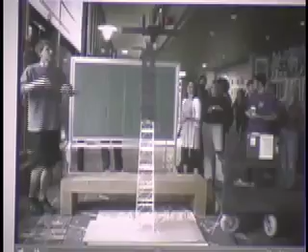And then you can take this video. It's unfortunately not quite the highest resolution, so when you blow it up, it'll be a little bit fuzzy. But you should still be able to frame through it, right when it finally fails, and get some idea of which member failed first, whether it broke at an individual member, or you can usually see some of them tip.

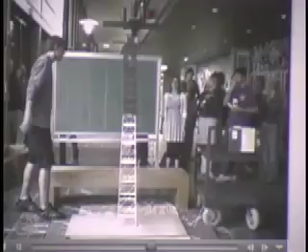This one's still got a ways to go. I don't know, see if we can speed the process along here a little bit. You can also speed it up.

And will he do it? We've got to get some more weights. I must say, I think it was the balsa wood perhaps, or was it at the base? It was the base that finally did it in.

And you can bring it back to life. Let me see if I can. Well, okay, I can't step through it so well. Why not? You should be able to frame through it. Ah, okay, we're one frame off there. Up, up.

Oh well, I can't get it. You can try to capture that frame where it actually fails. At 30 frames per second, you should be able, even at that kind of slow speed, to see it.

And then you can make some statement about why that member failed - that it broke, it was weak, or something to that effect - and get that all put together in your report.

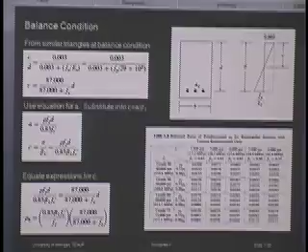So, let's see, we were supposed to do something today with concrete. Where am I? I'm supposed to talk about this. Oh, that means I don't even have my clicker. Man, this is primitive. Okay.

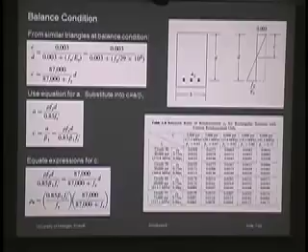Well, you probably worked through a problem already. You may have even done it yourself, the analysis problem. So we can probably get through this pretty quickly.

This always fascinated me, just this technique, the idea that you've got this little similar triangle up here, and then this big one that's kind of a philosophic concept, don't you think? This really exists, but this dashed line is just so creative. The idea that you could pull that dimension down, you add these two dimensions, it becomes this giant triangle that doesn't really exist, but you use this sort of figment to work out all this equation, because it's based on this ratio.

C is to D, this to this. So the D is the leg of this giant triangle, and there's the base of it, which is then that number there. It's that plus that plus that. That becomes that whole thing. So then you have a ratio of triangles.

It's amazing. I mean, who was this? The Greeks that came up with ratios and triangles, or maybe the Egyptians? No, let's say it's the Greeks. And we still basically use these concepts today.

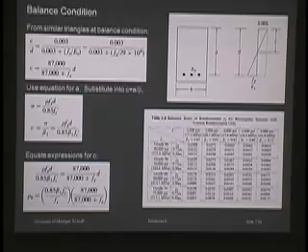And the myth has perpetrated for millennia, right? I mean how many, 3 or 4 at least. And it's not, they're concrete. This guy figured out not only that they were concrete, but where they mined the ore, what the formula was, how they put it all together. This whole thing -- you always see pictures, oh it was such a master feat to lift these big blocks way over their head, and up. No, they just cast it. Buckets, a bucket at a time, and all up there.

And the part of what kind of proved it is he found a couple things that were cast in there, like a toothbrush or different things that obviously weren't in the natural stone. A human hair, I think, supposedly. I don't know, well maybe not, because you'd think that'd decay. Maybe, well I don't know. A lot of things don't decay. Mummies don't decay. Anyway, yeah, toothbrushes, apple cores, everything was in there.

And then the ultimate proof, he wanted to take a couple blocks and break them apart. And the Egyptian government, when they heard this was going on, totally forbade him from doing that, because of course it would shatter this myth. Although it's still, I think it's even better that they cast it, that's kind of cool. But no, they wouldn't let him do it.

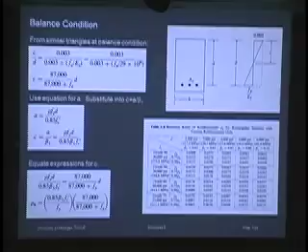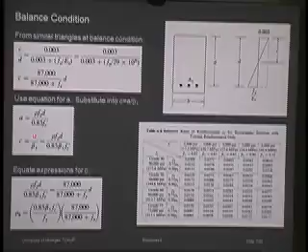Anyway, A, here we go. This is the formula for A, which comes from -- we talked about this already, didn't we? I better go on. But you substitute A, this is the formula for A, and you substitute that into here, which is the formula for C, and you get this, and then you have two formulas for C.

This one from the similar triangle for C, this one from the relationship of the forces. This is a force relationship, this is the strain relationship. So you equate the strain and the force like this. This one goes here, this one goes there, and then you solve for rho, which is somewhere.

There's rho. And this then, because this is set up, this defines the balance situation. This is failing, and this is right at yield, and this is the yield strain, the steel yielding, and this is the concrete yielding. So this diagram is what defines it as balanced. That's that diagram right there. If I put that on an exam and said, what is rho, when you see this, you should say, oh, that's rho balance, because that's right at the fail.

That's a definition of failure strain for concrete. Isn't that interesting? The definition of failure is by strain, really, not by stress. It's how much it's being crushed that defines the strain, that defines the failure. That's kind of interesting.

Anyway, so then that is the balance condition, and this balance is different. You can see, here's F prime C and Fy. So every time you have a different grade of concrete, there's a different balance. That's kind of interesting to know, because the amount of steel you're going to be allowed to place in the beam is dependent on what the balance is.

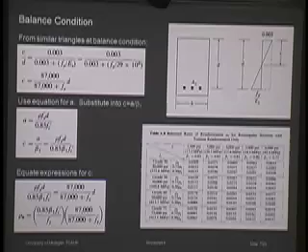So if you're designing a beam and you specify something like 2,000 psi concrete, you're going to have a big beam, that's going to be a chunk of concrete. If it's important to have a small cross section, then what you're going to need is a higher psi.

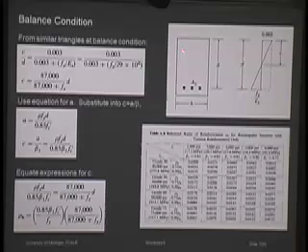Of course the concrete's stronger, but even more important, you're allowed to put more steel into it, so the whole thing gets stronger. It's not just the fact that the concrete's stronger, because really the concrete's only acting up at the neutral axis—it's a pretty small amount for the whole section.

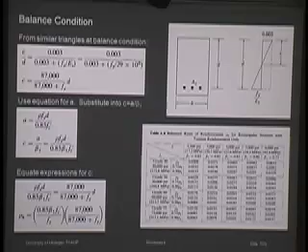Anyway, the price you pay is money, because the stronger the concrete is, the more expensive it gets. It gets more expensive because it probably has a little bit higher percentage of cement in it—more cement, less sand and stuff. It may even have some admixes to get the strength up that high, like a super plasticizer, a water reducing agent.

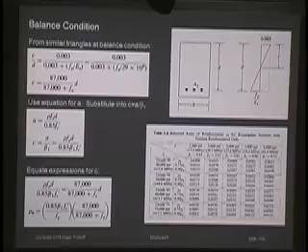Remember, the strength of the concrete is controlled primarily by the amount of water in it. So to reduce the amount of water, you're going to have to do something else to prevent it from getting too stiff. You may have to pay for an admix, a super plasticizer, or something that allows it still to be workable at a lower water content. That just increases the price of the concrete—it makes it better, but it's a little bit more expensive.

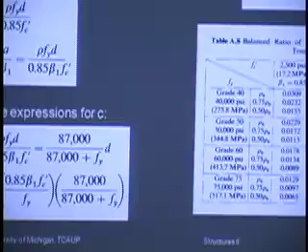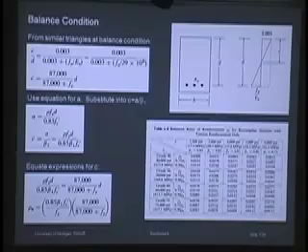So this may go higher—6,000, 7,000, 8,000, 9,000—you can get up close to 10,000 psi concrete, and this is just not your average mix. That gets to be the level where it's hard to do on site. It's hard to get a truck to deliver you that quality kind. Not that you can't do it, but it's going to take more quality control and everything to really ensure it.

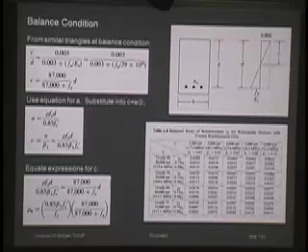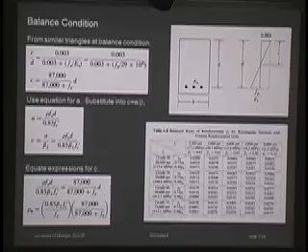In a casting plant it may not be so difficult, a pre-casting plant, for a couple reasons. One, you don't have the transport—you can mix it and dump it right into the form pretty quickly. You don't have to wait an hour in between for the truck to get there. You can also, in a pre-casting plant, usually deal with a much stiffer mix. You're probably not going to have to pump it or work it the same way you would on site. You can put it into a form fairly dry at a lower slump, at a lower water cement ratio, which will make it stronger.

So you generally can get higher strength concrete in a precast plant, which is an argument for using precast members, which I don't think are used a whole lot in this country. It doesn't seem like it—we do mostly cast in place stuff. But in Europe, particularly in Germany, they do primarily precast.

Yeah, what's going on? My batteries are surging or something. I'll be electrocuted, I'll start to glow. Smoke will come—sorry, I'm under control. Too much coffee this morning, I had 3 cups. Wow.

In Germany, in Europe in general, I think they do more precast. I don't know why they do that, and they truck it around, and you have special details for how it's erected. It's just the way they work. We don't do quite as much precast, but the advantage is you get better quality concrete, higher strength at a better cost, probably cheaper than you would otherwise. I don't know, be interesting if somebody could figure out why we don't do that here.

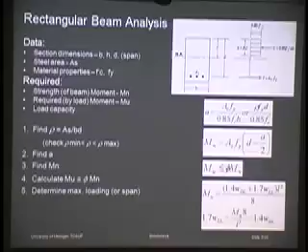Because if I increase this, I stuff more steel into it, then the compression in the top has got to balance it. So in order to maintain that T is equal to C, C's got to get bigger. If I stuff more steel in here, this is going to get bigger, potentially the strength of it. It will get stronger, so at that full load, this would have to also be bigger, this would have to go down. The only way this can get bigger is for this dimension to get bigger, so that would mean A would increase.

If I increase As, the stress block gets bigger. They're linked, you can imagine you stuff it in, it gets bigger, take some out, it's smaller. And the neutral axis shifts up and down. So as you put more steel in it, this neutral axis comes down.

Less steel will go up, but also it affects the strength there. The strength, of course, is based on that number there, times the moment arm, but that's a big part of it. Anyway, this actually isn't changing very much. Whether it goes up and down is not really that big a difference as opposed to the amount of force that would change there. So changing this would probably make more difference.

Okay, so you get A, you plug A into there. You already have these dimensions, right? That gives you right away Mn. Mn, you can equate, this is the strength of the beam. If you put the safety factor on it, then you can equate it to the load capacity. And this also has a safety factor on it, remember. This has got the gamma, the load gamma factor on it, and this side has the phi factor. So this is the fully factored equation here that equates the loads to the strength.

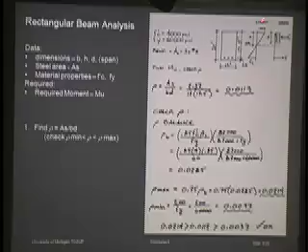Anyway, here's our picture. Strain, okay, this is going to be at ultimate. Now this is a little bit interesting here. This is not necessarily balanced, right? This is at ultimate because whenever you see that number, the concrete's failing, okay? So this diagram represents the ultimate strength. But look at this, what's with this?

Little, what is that, epsilon? Yes, that's the strain, that's the strain in the steel, not necessarily the yield strain of the steel. The steel may, well, wait a minute, what am I saying? Maybe beyond Fy, right? No, it couldn't be beyond Fy. Oh, yes, the strain could be beyond the initial yield, I guess, because the steel has to yield first. But I have to think through this a little bit. Why is that like that? Well, anyway, this would represent failure. I think that could be. Yeah, I guess that is. I'm trying to.

If we put more, if we have, now the steel should yield. If this is at failure, this might be beyond the strain for yield, I guess. Well, that's kind of strange. At any rate, you don't need it. The reason I pause is because if you go beyond the yield strain for the steel, then once the steel yields, that defines failure. So what would maybe happen is before you'd reach that number, this would reach the yield strain, but then that would kind of be the end of the strength of it.

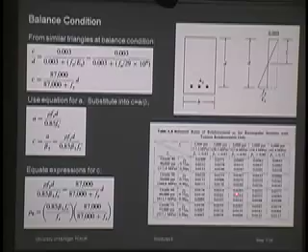So okay, well, whatever. This is the setup of the force stress blocks. If I want to check it for the rho, to make sure I'm within, I've got to be between a maximum and a minimum, right? This maximum, we could have, where was that, what did I just have? Grade 60 and 4,000, here's 4,000 PSI and 60. This is rho balance, 0.0285, and this is row max, 0.75 row B is row max, 0.0214. This number, 0.5 row B, is just kind of a target number used for design, that's what might be a good number to have. So that is max, I'm sorry, this is balance 0.0285, and max is 0.0214. So to...

Calculate it, this actually does the calculation. Hey, get the right answer, 0.0285. So that's with the formula. And the maximum is 0.75 times that, there's the 0.0214. The actual is just simple AS over BD, there's the BD. 0.0113, I forget what was 0.5.

So this is actually a little bit below 0.5 rho balanced. So it's not so much reinforcement. Could have put more in there, but it may be enough.

A lot of times these dimensions, 20 by 12, will be determined architecturally. It may be for the whole building, using a consistent depth for the beams, because it's nice to keep a consistent depth. You might even keep a consistent width because they may be matching up with columns. So the depth and width may be set, and you'd control the strength by the amount of steel you put in it.

So a lot of times these numbers will be even, 20 and 12. Somebody's got to build formwork to match those, right? But the amount of steel and the placement of the steel doesn't necessarily have to be.

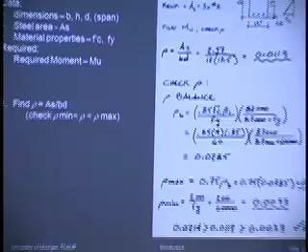Well, there are little chairs underneath here, I guess in even increments, and you have to have an even number of bars, but it could vary the strength anyway by that. What's not shown here, and we talked about this before, is there's a stirrup in there, a little U-shaped thing that resists the shear force.

So getting back to this, here's the minimum amount, 200 over Fy. This is in there to prevent initial crack propagation, and that's pretty low, way below this. So our number here is definitely between that, so it looks like we're good.

Then you can go ahead and find the capacity of it. You simply plug the numbers in. This is the formula for little a, the stress block dimension there. And there's the steel, the amount of steel. There's the grade of steel. This 0.85 is a constant applied to F prime C because it's used in a beam. So there's those.

This is the depth of the stress block, in inches, 3.49. You can think of that as a number you can reason about, right? It's not very big, but at least it's a number, 3.5. So, okay, it's about like that.

So you're saying, okay, that's how much concrete is effectively acting in compression. If you got a number like 0.02, no, I don't think so. That would mean you don't have even a sliver of concrete acting. Come on, that makes no sense at all.

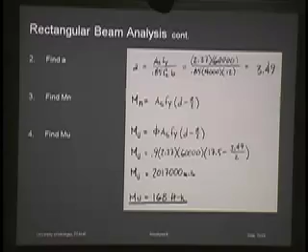This you could take then, and that Mu - how much time do I have? Oh, maybe I won't do it right now. And run through this then. You could take this, if you wanted to know the live load, you could subtract off the dead load. You know how to do that? Maybe that would at least be worth mentioning in the scheme of things.

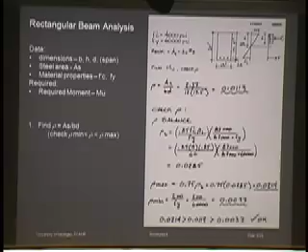You know how to get the dead load of this? If you have the - no, not with that one. Try this one. Oh, much better, man, okay. Try this one. Ah, just right.

Okay, area over a conversion for inches to feet, and then the density, 150, which is pounds per cubic foot, equals pounds per linear foot. So if we took the area of this, 20 times 12, right, we've got - is that right, 240? No, that would be, yeah, that's right. Over 144, are you figuring this out? Yeah, good, very good. Times the density, this is the density of concrete.

This number, concrete by itself is usually about 144. It's pretty consistent at about 144, but they use 150 generally in practice to account for the steel. You got a little bit of steel in there, so it's a little bit heavier. So that's kind of a pretty close number, which comes out to be 250.

Really? Yeah, because these are almost the same. Okay, a little bit up. Pounds per linear foot. So that's how much it weighs. The beam itself is weighing that much. You could stick that

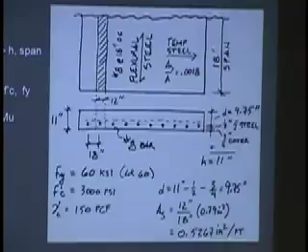The only thing that is a little bit tricky is you've got to define what the steel is per foot. And you can imagine if these bars were exactly a foot on center, well, that would be beautiful. Then you could have 1 bar per every 1 foot cut, right? You know, if you're 1 foot strip, you'd have 1 bar in there. But if the bars aren't a foot on center, well, then you're going to have to adjust it a little bit. If they were more than a foot on center, like in this case, 18 inches, well, if it's 18 inches, then you have less than 1 bar per foot, right?

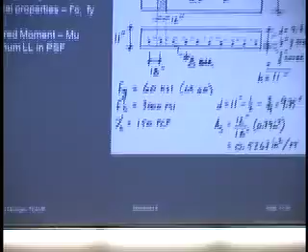It'll be less. So if 1 bar, what bar do we have? Number 8, is that 7.6 or something? Where's this? What's the area of a number 8 bar? 0.79. Okay, so if I've got

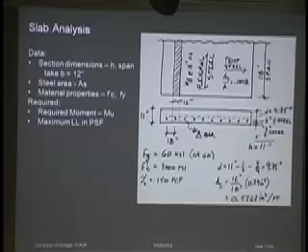the area. I want to find AS, right, per foot. 12 inches. Then I'll take the area of the bar, right, the area of that number 8, and then I have to spread it out for 18 inches on center. I'll have to spread it out, so it would be 12/18, right? That would reduce it. That's going to make it smaller. That would be

0.79 times the 12/18. It's probably up there somewhere. Oh yeah, there it is. 0.527, whatever, and that would be inches squared per foot. Right? That way you can, and the best way to think about it, just think about it logically to get that equation right.

If the spacing is greater than a foot, the 18 inches is greater than a foot, then you're going to have to be taking less than a bar. It'll have to be less than the area of one bar. If I put them instead like 6 inches on center, right, then I've got more than one bar in there.

And then you'd have, this number would reverse, right? You'd have... no, I'm sorry, this ratio stays exactly the same. But you'd have a smaller number down there. You'd have like 6. So that would then double the area. The area would go up.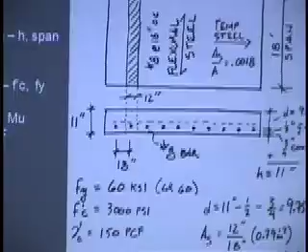And that has a minimum for slabs, even lower than the minimum for strength reinforcing. That, of course, you'd put on top so that the strength steel, the primary steel, is as far to the bottom as you can make it, because you've got to get this value D as big as you can have it. So it's measuring from the center of that steel up to the top of the slab, which in this case is 9.75.

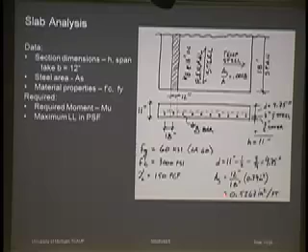That's D. Here are these other things - the density of the concrete. Oh yeah, look at that. And there's the area of the steel. So you've got all the pieces.

Again, now it just becomes like the other problem - you plug and chug, just plug all those numbers in. Here's the area of the steel per foot, there's the strength in KSI. I've got to keep this consistent - these two have to agree. If I put that in KSI, this has got to be in KSI. That's 3 KSI. Then the width.

This is the 1 foot strip, looks kind of like this. If you look at the picture, there's a moment arm - that is the depth of the stress block. Not very deep, but it is a slab after all. The whole thing's only that deep.

Then you calculate T, A-S-F-Y, AS based on that 1 foot dimension. Okay, the moment arm, we got D already. There's A, blah blah blah. There's the moment arm. The moment, the strength moment's going to be that times the moment arm, TZ. So you get that - this comes out in inches right now, kip inches, and then you multiply.

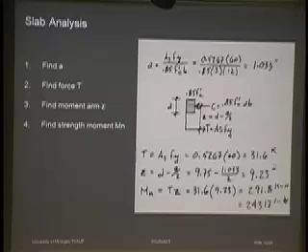Multiply? No, it should be divide. Oh, this is in feet. Okay, divide by 12 and multiply by 1,000 or something. Anyway, you get it in kip feet. That right there. So that's the strength, right?

We probably want the capacity, though. Okay, to get the capacity - oh, here's this. I should have looked at this page. Here we already have it. This is the strength.

Oh, this isn't the one I did. I was going to say my numbers don't match - that was the last one. This must be for the 11-inch deep slab, right, by one foot wide. So it's 11 inches deep and 1 foot wide.

Divided by 144, so per foot you've got that. So that comes out - I mean, you're taking a linear foot, and it's 1 foot wide, so that's per square foot. So that comes out to 137. You can think about that too.

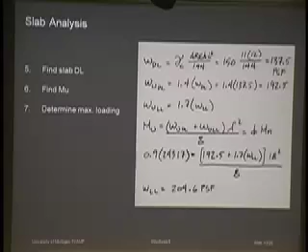If this number were 12, then this should be 150, because that would be 12 by 12 by 12 by 12, if I'm assuming it's a 12-inch length. That's kind of implicit, because I'm figuring the weight per linear foot. So there's a 12-inch length, we're using a 1 foot width - we just picked a width of 12, the 12-inch strip. If the slab were 12 inches deep, so a 12-inch deep slab per square foot weighs 150.

That's the density - that is 1 cubic foot. If we had a 6-inch slab, what would it weigh? 75 maybe. If you had an 11-inch deep slab, what's it going to weigh? Less than 150, right? It would be 137 or something apparently, per linear foot, which is square foot.

All right, then we put the gamma factor on it, and that gives us the factored load there. See, this is without the factor, this is with the factor. We have to have it with the factor so we can put it into this equation. This is mu, which has the factors on it. Here, this one is the unknown in this case, but we know what that factor is.

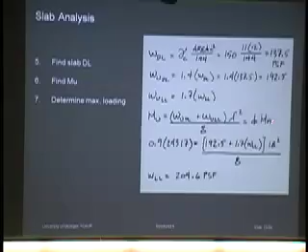So we put those two in. This we knew, and we also know this now because we just calculated that and the phi. And the only thing you don't know then is that guy - you can solve for that. So 200 pounds per square foot would be the capacity of that.